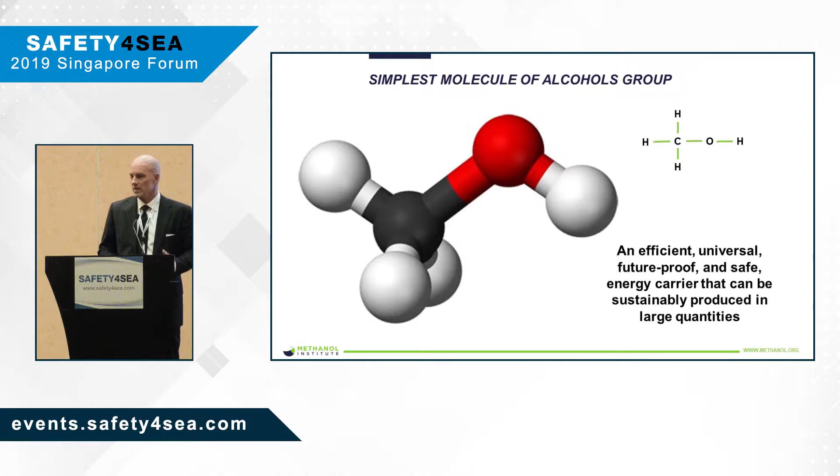In talking about methanol in a marine application, it's important to keep in mind that it's the simplest molecule among the alcohols group. Many of you may have heard of ethanol, which is the one you can consume. Methanol is not, but with a single carbon atom, it's highly oxygenated and laden with hydrogen. It's probably the most efficient hydrogen carrier out of all the molecules out there to date, as hydrogen in a non-separated form.

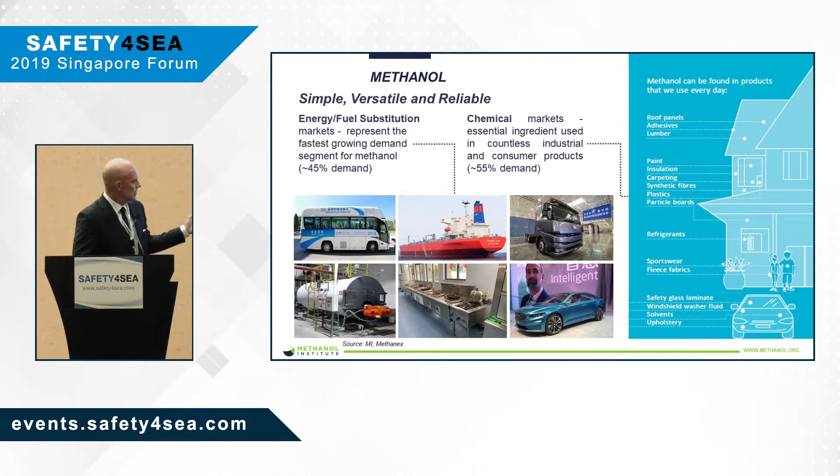The methanol market is broadly divided between petrochemicals, resins, glues - it's a petrochemical feedstock, but it's also been involved in the fuel sector for many years. The lower right shows an M100 vehicle. Recently, China has adopted policy paper 61, which is lending quite a big support to the development of methanol as a fuel within the transportation network. Upper left and upper right are methanol fuel cell vehicles as well, Class 8 trucks, and it's extensively used in the industrial boiler market as well as cooking stoves in China. These are already multi-million ton markets on their own.

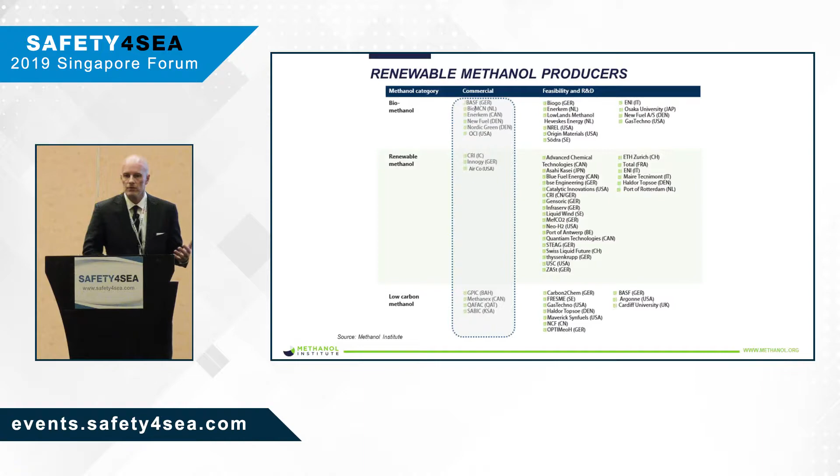Inside of China, methanol is produced predominantly from coal. Outside China, from natural gas. But there is a growing market for renewable methanol, and this is being led by demand from the downstream derivatives markets for such things as toothpaste, lampshades, clothing. Many of these manufacturers are also looking to lower their carbon footprint, and as a result, they're demanding lower carbon feedstocks.

This is also important to note because as we move forward, we can already see in many countries renewables, mainly solar and land-based wind, have already reached the tipping point with respect to coal and natural gas, meaning they're cheaper to produce than coal or natural gas power.

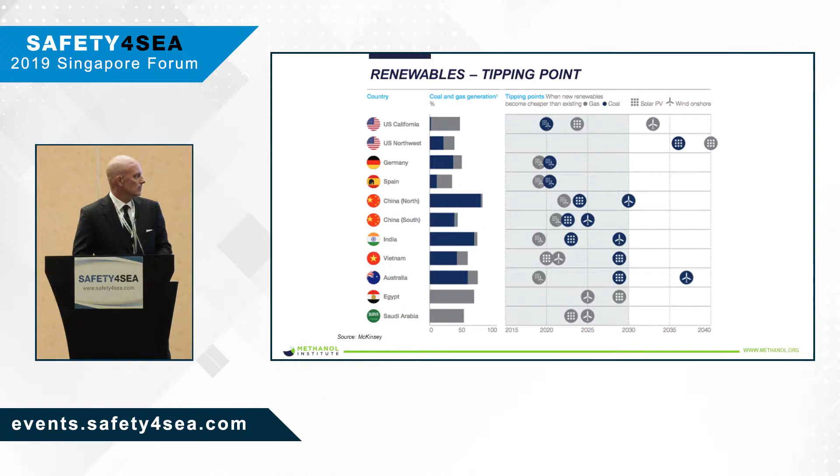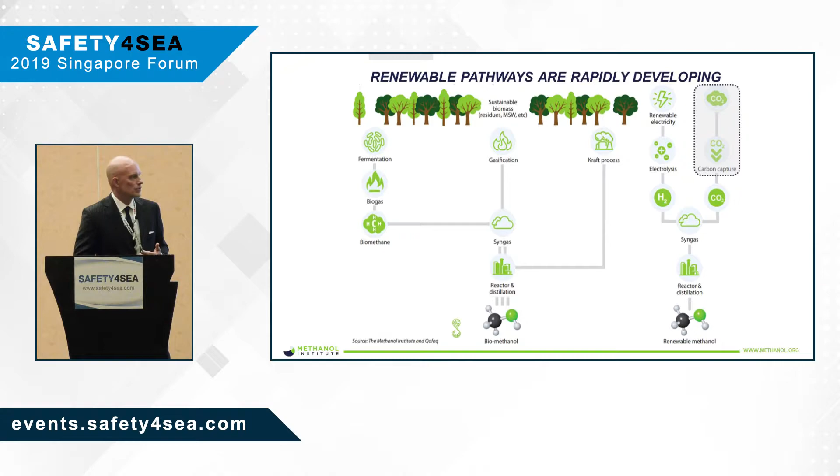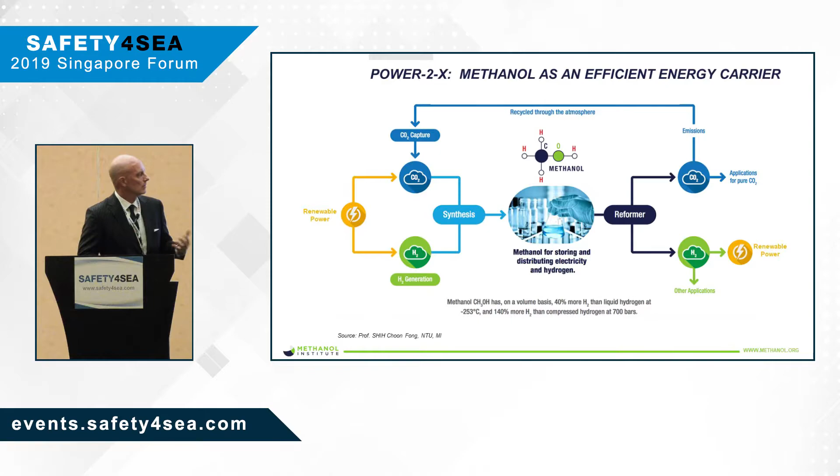Methanol can also be produced in a renewable way through fermentation, which has been done for centuries, but also gasification, which is also quite popular. In this respect, we're moving towards more of a circular economy, where we're using a liquid, in this case methanol, to capture renewable power. Renewable power is difficult to store. Energy in general, or electricity, is difficult to store. Currently, it's mainly only battery power that's available. But in using a liquid, it provides a means to then move it efficiently, as well as reform it to fuels or other potential uses.

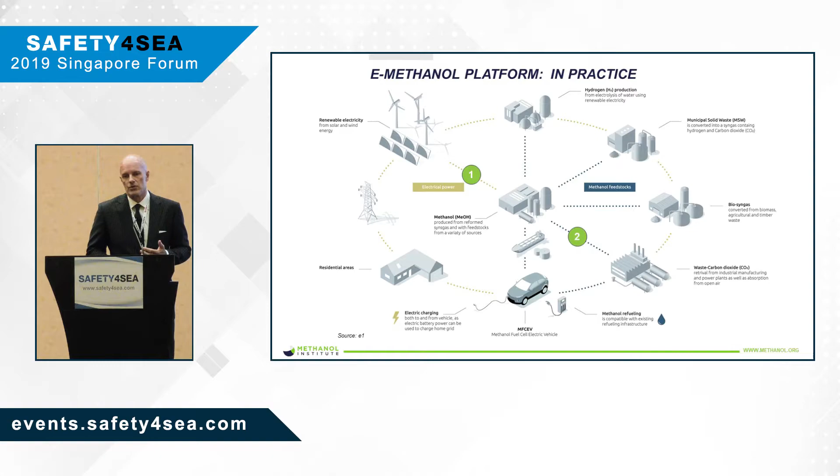By setting up this type of a platform, you can then begin to include other waste streams, such as waste CO2 or bio-syngas, or even pure hydrogen into this format. We like liquids because they're just more efficient. Batteries have a limited discharge time, whereas working with a liquid fueling a fuel cell perhaps can prolong the power and extend the range of whatever application we're in question.

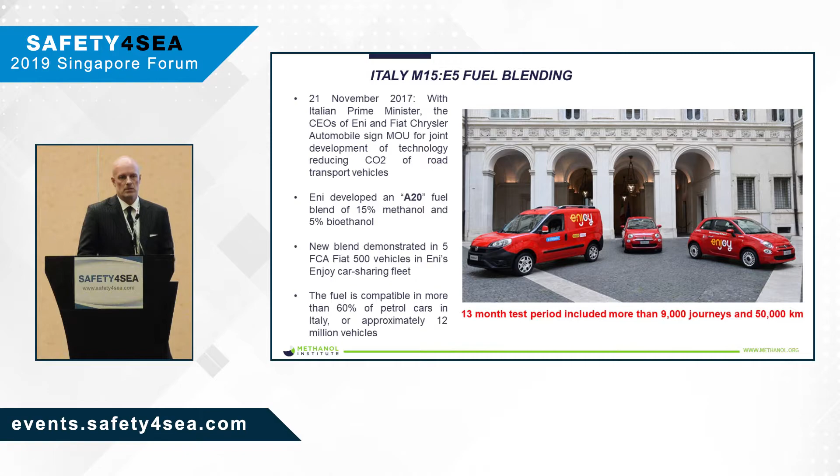Just to touch base on this briefly, we have a lot of experience in the automobile and heavy equipment industry. These are a few examples of methanol being used where, for example, ethanol or E5 blending requirements are not able to be met, such as in Italy or China. We have found independently that in most cases this E5 is not actually E5, it's more like E1 or E2, and the balance being taken up by methanol because it's cheaper and even more efficient than ethanol, providing the same emissions benefits.

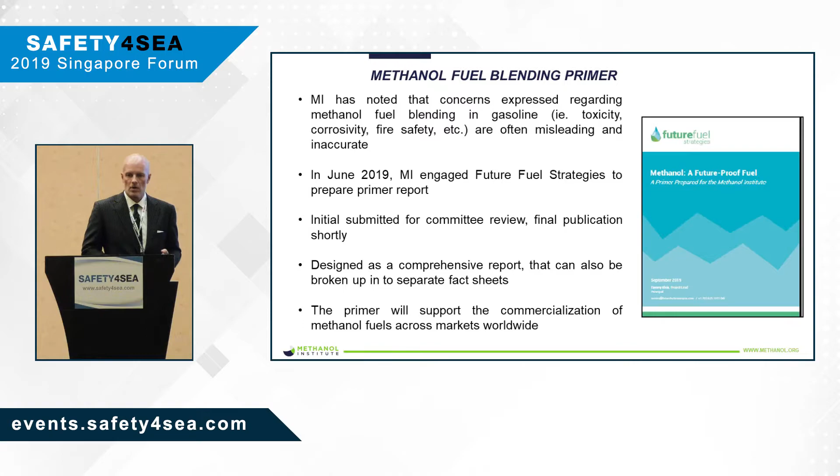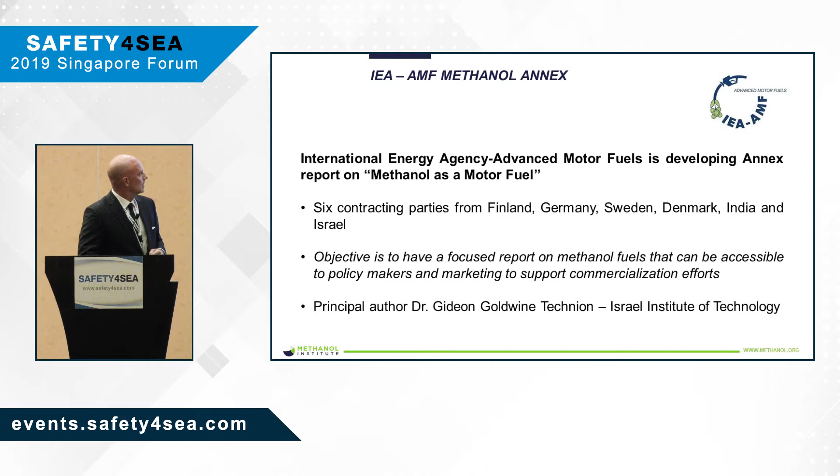We work with governments to provide them with adequate tools to enable them to include and expand the use of methanol in fuels. Recently, the Worldwide Fuel Charter allowed the inclusion of new language in the 6th edition to highlight methanol in the EN 228 inclusion for gasoline in Europe.

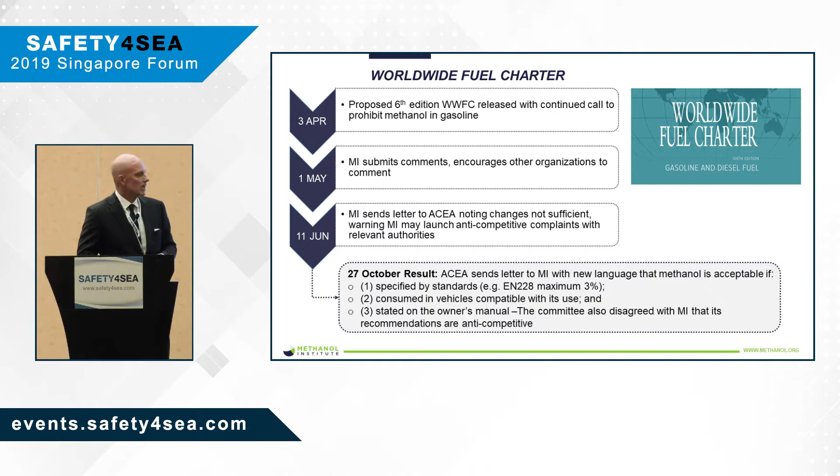Coming to marine fuels, because of the proliferation of methanol in the broader petrochemical markets, we can see it's widely available already. So when we talk about whether it could be available in a marine context, we can clearly say that it is. We recently conducted an independent study and determined that methanol was already available at many ports, over 100 ports globally.

It's important to note that the interim guidelines for using methanol as a marine fuel were approved in September, just 2 months ago this year. It will be officially approved at the Maritime Safety Committee's 102nd session by June of next year. And interestingly, next on the agenda are fuel cells, an application being considered as we move more into advanced fuels.

It's important to keep in mind that the IMO strategy includes what's referred to as levels of ambition combined with guidelines. I mentioned the interim guidelines for methanol as a marine fuel have been approved in September. But the levels of ambition are all around carbon intensity as well as greenhouse gas emissions, of which there are 3 types.

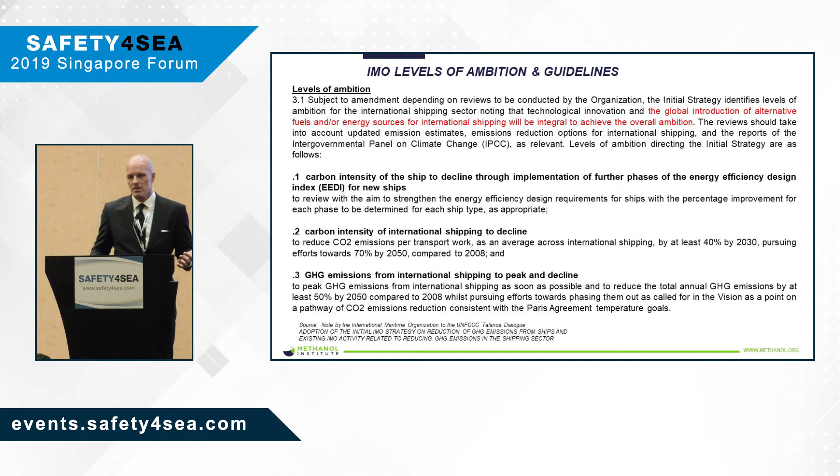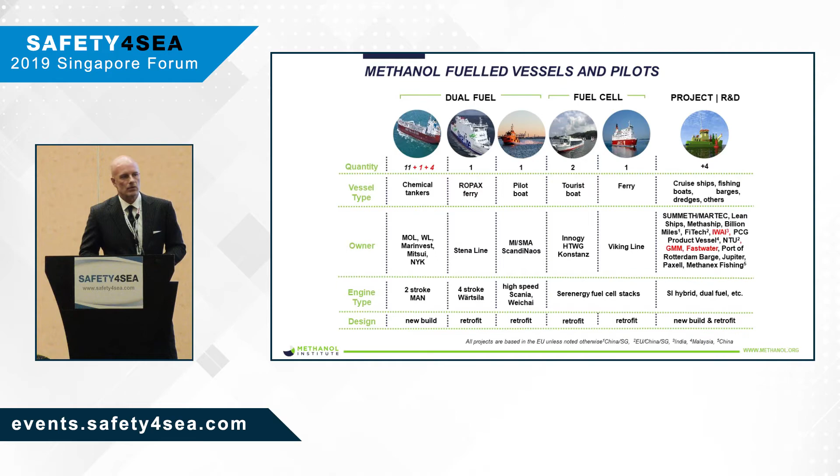This legislation has also incentivized us to move forward with a number of pilot projects. At the moment the most well-known, I guess, is in the tanker segment. We have 11 vessels currently trading with 1 more to be delivered in December and another 4 on order for next year.

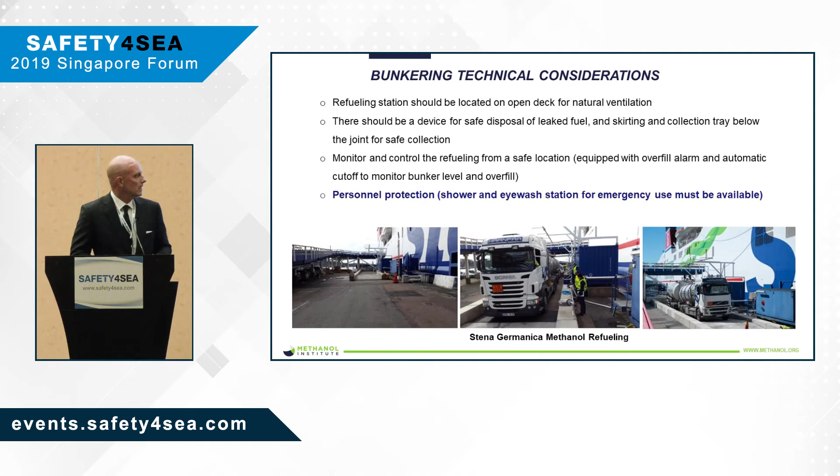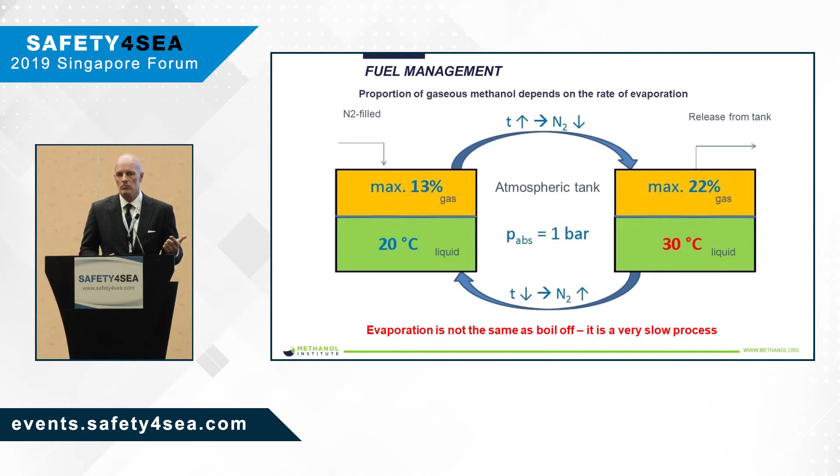Bunkering methanol is quite straightforward. We've already begun an exercise with a classification society to put together bunkering guidelines as a technical reference. But it's quite similar to bunkering distillate, where you're managing evaporation. We use nitrogen blanketing as well as temperature control on both sides of the flange.

And it's quite safe. Methanol has been involved in performance sports or automotive sports - drag racing, power boat racing, rally, and Formula One. This isn't meant to be read in detail, but just to demonstrate that it's not more dangerous than gasoline or diesel.

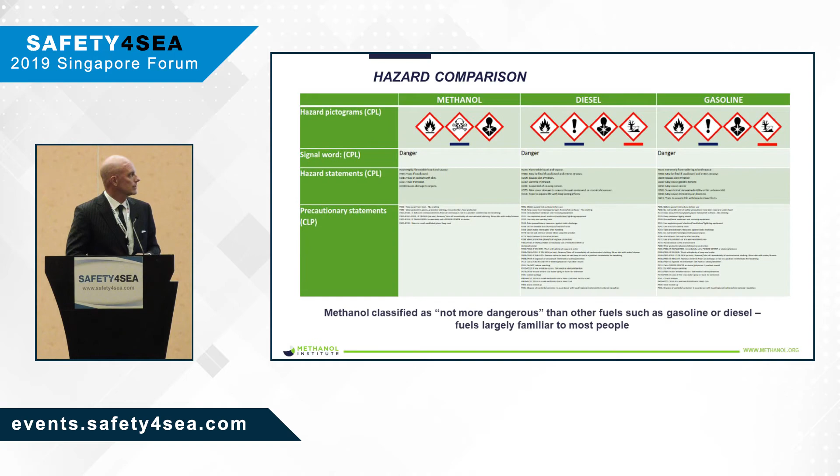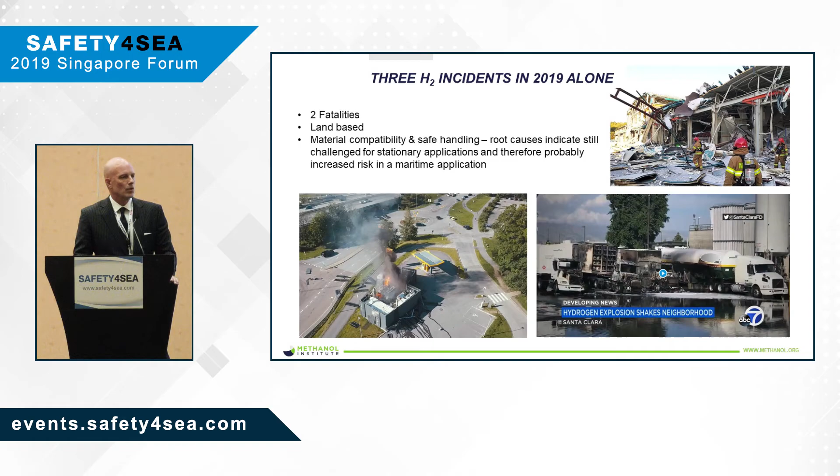I was going to talk a little bit about hydrogen, but I don't think I'll have much time. We also work in many applications mainly connected with fuel cells. It's important to note that handling and storing hydrogen, which many governments and organizations are trying to move towards, is difficult. It requires a lot of space and completely different material compatibility, and as such methanol is widely seen as probably a better carrier in this respect.

In a marine application, we have this type of technology where methanol is reformed on board alongside the application itself, whether it's a fuel cell or direct injection into, say, a distillate. So we have this experience as well, which can provide immediate benefits such as fuel savings.

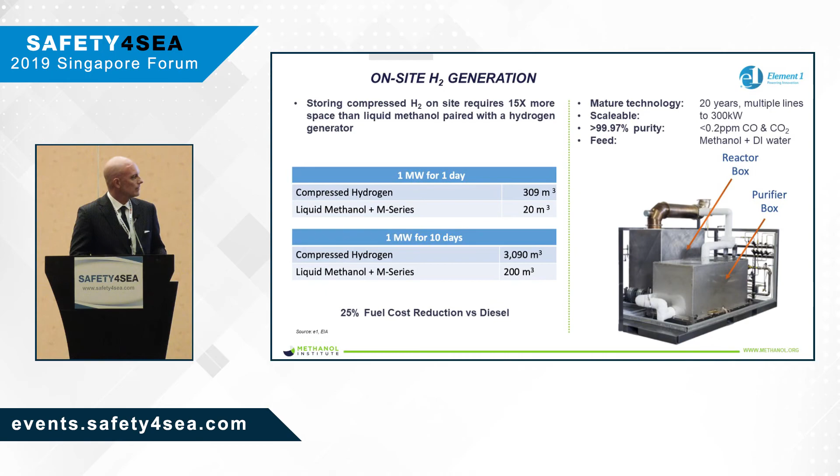I will, I think, stop there with 30 seconds left, but I've included a few more slides which you can refer to once they're handed back. So, thank you very much.